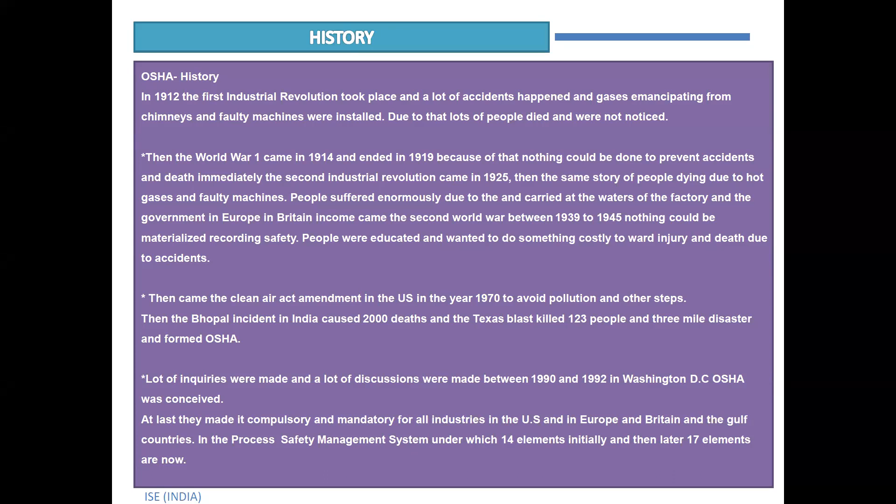So what is a catastrophic consequence? What happened in Bhopal? Most of the people may not be knowing what has happened. When I saw it in the paper in 1984 in the morning, I was in Mylapore where I was staying. When I read the paper, when I came over from the factory, I saw that 2,000 people had died - because I was working in the same chemical industry for about 15 years.

I have passed since I got my job there, so I was astonished to see how it had taken place. Most people may know what happened, but they do not know the history of things. I am telling you about 1967. I'll just give you 10 minutes, because people have to know what happened - people may not know the catastrophe, how it happened in Bhopal.

So people think 2,000 people died because gas leaked out - that is not the thing. It is purely a management misnomer. This is how it happened: in 1967, Bhopal - Union Carbide, the American MNC, had two plants installed, one at Jammu and another at Bhopal. They wanted to manufacture Sevin, the pesticide. They were using rail tankers to transfer the MIC liquid to the Bhopal plant, and then they were manufacturing the pesticide.

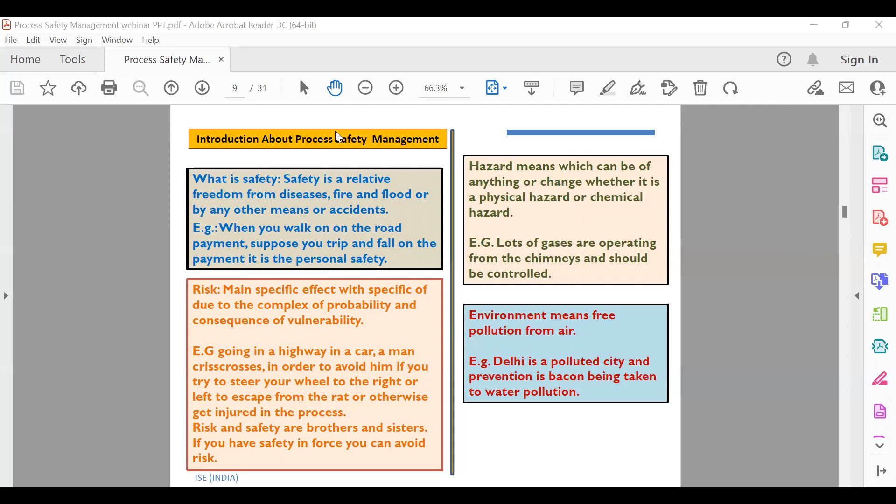How... Your voice is not audible, sir. Are you speaking? Arun? Sir, it's audible. Sir, it's okay now. Yeah, I'm able to hear you. Sir, safety is a relative freedom. Sharing ended, Arun. Please reshare. Just a moment, sir. Arun, are you able to share? Yes, sir. Do it fast, please. It's okay now, visible. Put it to full screen. Yes, perfect. Narasimhan sir, please continue. Thank you.

So I am talking about what is safety. Safety is a relative freedom from fire or disease or floods or any other means of accident. What is disease? Suppose you have floods, like what happened in 2015, when Madras was flooded. Lots of people were affected because of disease, endemic becoming pandemic, because of cholera and other diseases. So safety should be there. Stormwater drains should be perfect.

Fire. If there is any fire in the factory, you must have a fire hydrant pond to mitigate the fire. There should be a fire safety alarm. Then you have to take on-site emergency and off-site emergency planning. You have disaster management. These are the basic outline. Suppose fire happens in a gated community or in a factory, whether it's a process factory, a batch process factory or a mechanical factory, you must have a fire accident and disaster management team to mitigate the accidents or any floods.

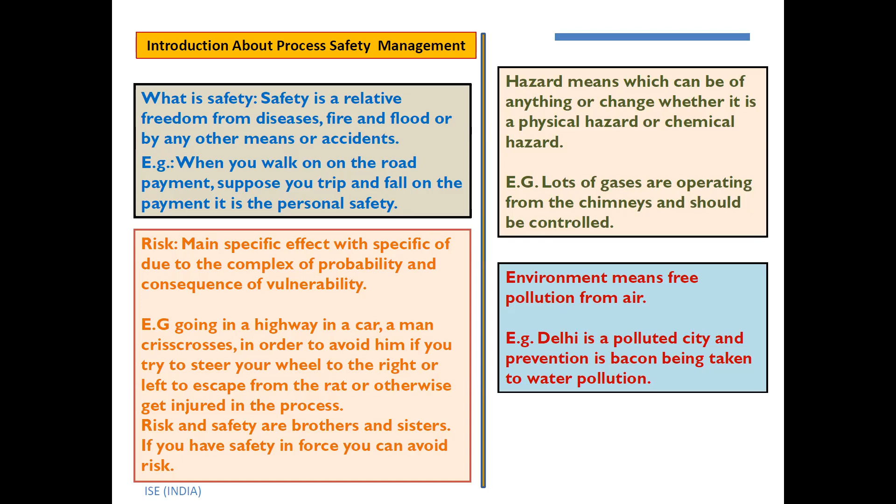So there I am giving a small introduction before going to the objective. If you have proactive management, you can plan the execution of things. You can do the safety work related to plant shutdown or anything accordingly. If it is reactive management, only when the accident happens will they analyze everything. That leads to a lot of consequences. So reactive management should be avoided.

Then preemptive management. In preemptive management, you must have things in force beforehand. You have to do a hazard study before commissioning and after commissioning. What are the consequences, existing and proposed? All such things should be there. So I am coming to organic safety. The organic safety of the management: conviction, compassion, communication, humility, and humanity.

What is conviction? The management should have conviction to start the plant when it is necessary. If they deviate from safety, then that will cost you millions of dollars. So safety, the conviction, they should have the conviction. Safety in force. At any cost, they must do the safety work. Even if gas is leaking through the pipeline, they have to shut down the plant, do the necessary work, then only start the plant.

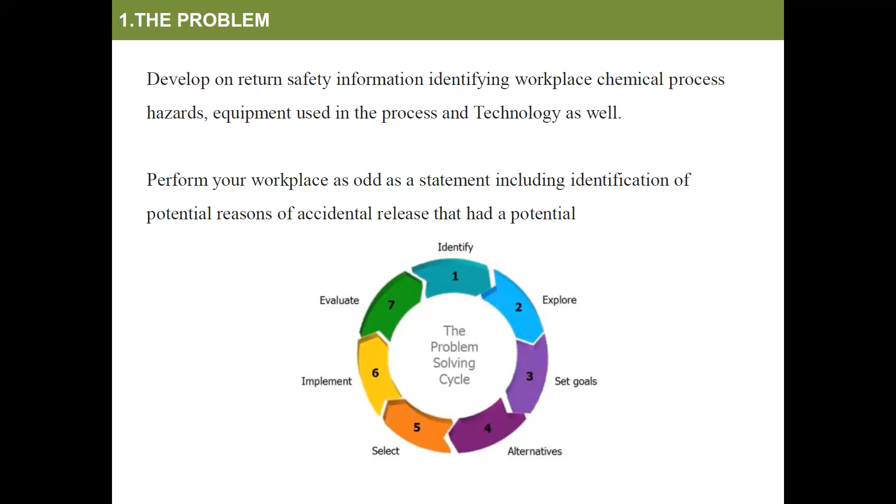How the standard works: establish a system for workplace hazard assessment, findings, prevention, mitigation, and emergency responses. Establish a system. You must have some system to establish the hazard assessment. Suppose it is ammonia, or hydrogen sulfide. Suppose you are starting the plant; you must have standard operating procedures for a long shutdown. What will happen if there is an emergency shutdown, what will be the consequences? If it is a power shutdown, what do we have to do? There are so many things.

They were not able to get gas for the last 4 years. They were applying hot water over the cylinder to get something, but they were spoiling the entire thing. They were not able to get the gas. I went there for such an audit last month. I gave a small suggestion.

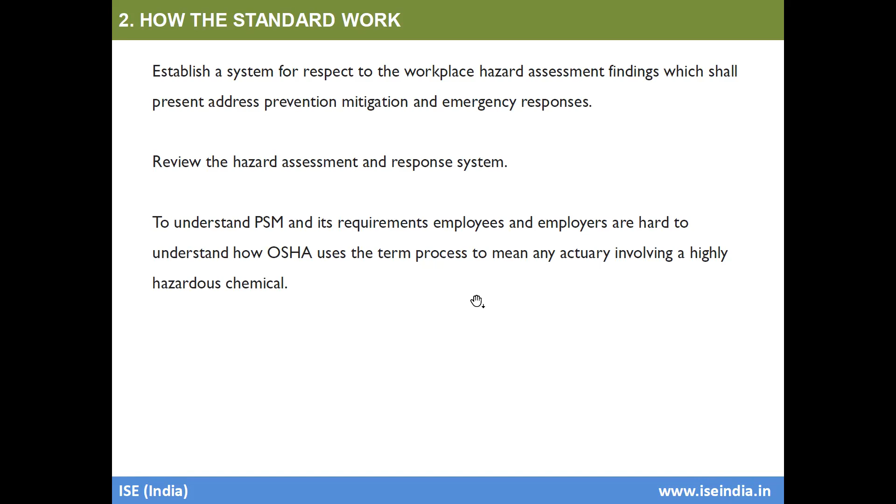So process safety information. Employers complete a compilation of written process safety information, whether it is an ammonia terminal or sulfuric acid plant or phosphoric acid plant. Everything should be a compilation of written process safety information. Whoever comes to the plant, if there is an operating personnel who has got some problem, to notify the problem, he has to refer to the compilation of written procedures. You should have process safety information on file.

Before conducting any process by the standard, if anything happens, any leaks or anything, he has to refer to how to do things. If there is a power shutdown, suppose it is a long shutdown, the process compilation will be there. How to do things when there is a long shutdown or emergency shutdown and power failure. They will also have information on the highly hazardous chemicals.

How to use them? Suppose you want to start a pump, carbonic acid pump, carbonate pump, or H2S pump, that is hydrogen sulfide pump, because both are hazardous chemicals. If you use them, you will have how to start the pump physically. A lot of information would have been given. So that is the process compilation.

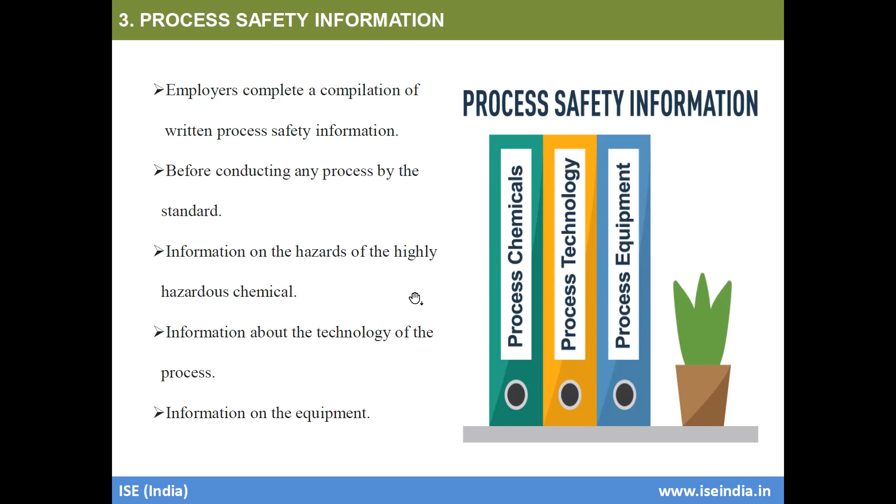What is process hazard analysis? Process hazard analysis means, suppose it's ammonia, what will be the thing? Then is it a hazard for highly hazardous chemicals? The employer must follow the methods. A process hazard analysis under hazard study they will do. Failure mode effect analysis, fault tree analysis. I am just coming to a small pep talk about these three things.

What is hazard? Suppose you want to commission an ammonia terminal. What they did in 1996, where I was the process in charge of the plant, was we took about 6 people, consisting of process engineer, supervisors, operating personnel, general manager, instrument engineer, and the people who are going to install the plant were also included. So we studied the hazard of any equipment. We do the analysis before commissioning and after commissioning.

It's a big plant, consisting of an atmospheric storage tank of 12,500 metric tons volume, because it is a double integrity tank, outside and inner side. The inner side is the inner cup. It stands on 279 pillars, where the storage tank stands 26.454 meters. Inside, the suspended deck is 4.54 meters. Between the outer tank and inside tank, 15 mm

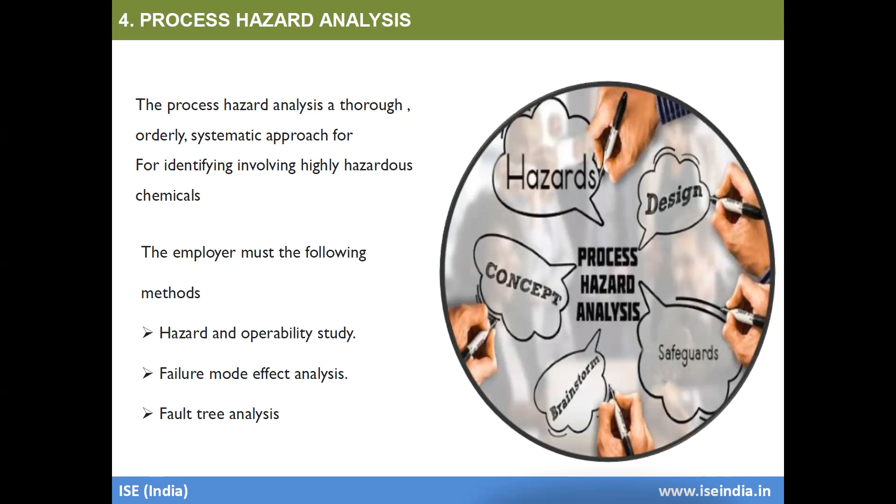Sir, we can take another 15 minutes. Yeah, I'll finish it. I gave a lot of examples, so you can brush up, sir.

Operating procedures: the employer must develop important written operating procedures for initial startup and operating operations, temporary operation, and emergency operation. This gives you standard operating procedures for what you have to do during initial startup, normal operation, long shutdown, temporary operation, and emergency operation. This operating procedure should be posted in the panel.

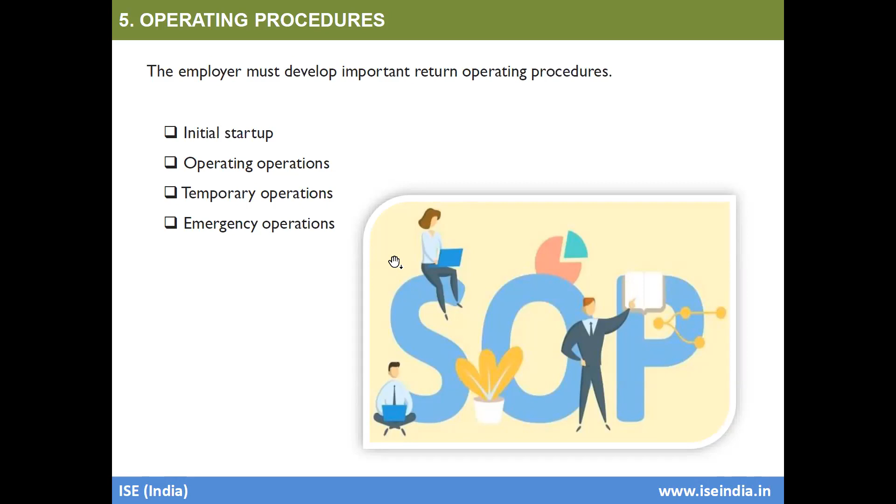Employee participation helps to control the cause of related risk. The employer must develop a written plan of action and implement employee participation as required by PSM. They should provide employees and their representatives access to process hazard analysis. Every employee should know the plan of action and participate in OSHA training required by PSM. Management has to involve employee representatives to inculcate the process safety management system, and representatives should analyze the process hazard analysis to gain knowledge using PSM.

Training: OSHA believes that implementation of an effective training program is one of the important steps to take. Hence, people presently involved in the operation should know about the process and its procedures. Employees are required to operate the plant according to its operating procedures. Process safety management training is a must for all employees and all categories, whether batch-wise, mechanical, chemical, electrical, or manufacturing. OSHA believes implementation of effective training under the 14 elements, and later the 17 elements, is a must.

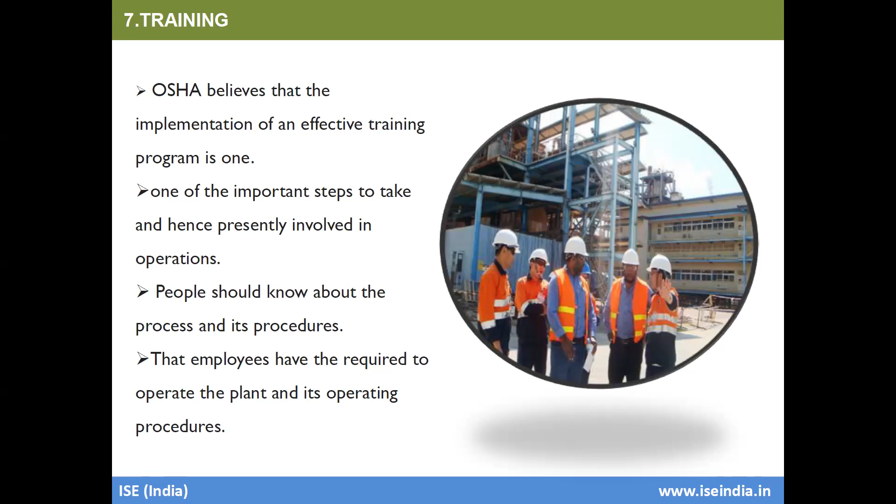What is refresher training? Refresher training of OSHA has to be given to every employee at least every 3 years. They have to undergo all of this because if a man doesn't know anything about PSM and comes for work, there is no need for him to come over - he can stay at home. So when management decides to impart the knowledge of PSM, every employee has to undergo training every 3 years.

There's also toolbox training every 15 days, and a quiz contest test every 3 months - they have to give so much training to the employees, managers, and supervisors. The general manager also has to know this; he should not just get feedback from lower rank people, he should teach the people. Only then can he be an effective general manager to the managers as well.

Training and documentation: the record of the employee must contain the identity of the employee, the date of training, and how it is verified that the employee understood the training. So if a man undergoes this process of gaining knowledge, he should attend the PSM training. Then his identity will be marked, the date of training recorded, and it will be verified by management whether the employee understood the training through a test. If he completes it, he will be eligible to operate the plant.

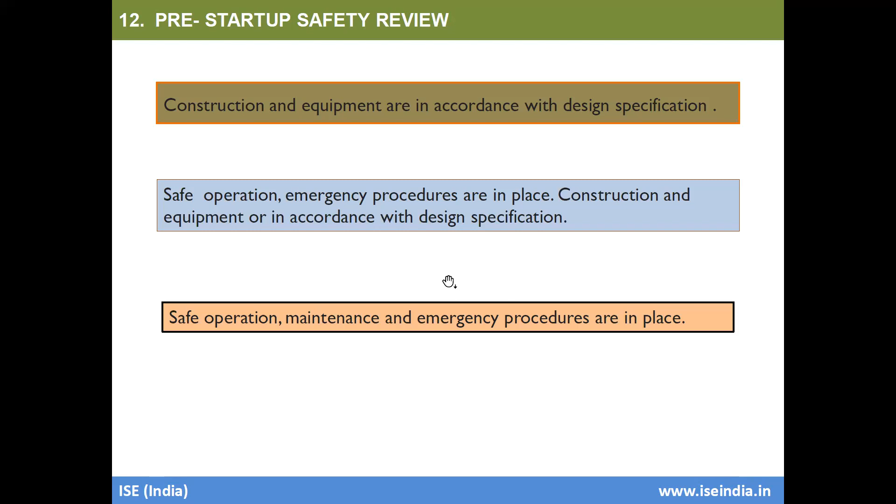What I told was what happened in 1983. There was nothing, because process safety management was not available at that time. Because of that, an incident happened in 1983, caused by the production manager, who didn't know anything about it. I have to say that because he didn't know anything. He became a top guy at RPG Coimbatore. He's a chemist, joined DCW, came as a process manager, and then went on to become the top guy, president of the company at RPG Coimbatore. He doesn't know anything because he is only a chemist.

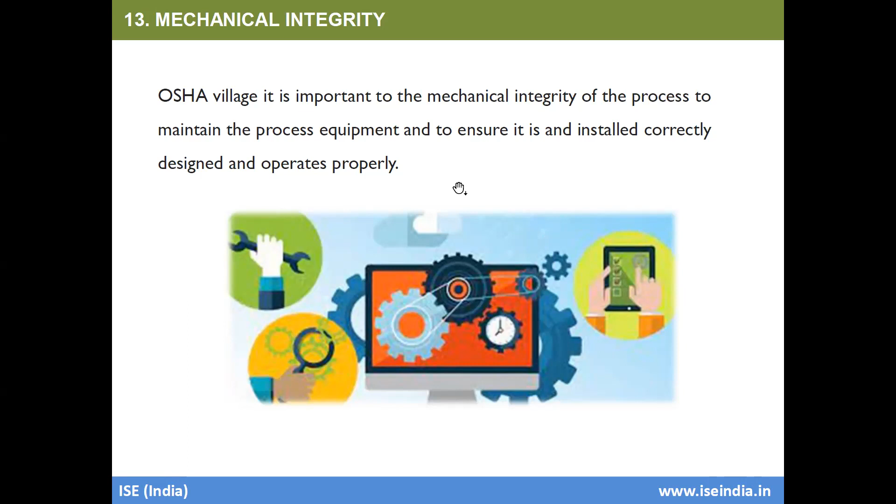Hot permit system: hot permit should be used for hot permit operation, conducted in an overhead process. The permit must dominate fire protection, etc. Regulations are being implemented. If there is a cold permit, anybody can give it to a worker or technician, and he can come and if there is a gland leak in the pump, they can do it. If there is a hot permit, suppose you want to take out a vessel or clean it, you have to keep a hot permit. If you have to check the thickness of the vessel, you have to do a hot permit, and you should be given welding.

For that, you have to do analysis of the oxygen, what will be the lower limit, what is the upper limit. Then you have to put an air hose in and do the welding. There is a lot involved - you have to purge with nitrogen, then put the hose.

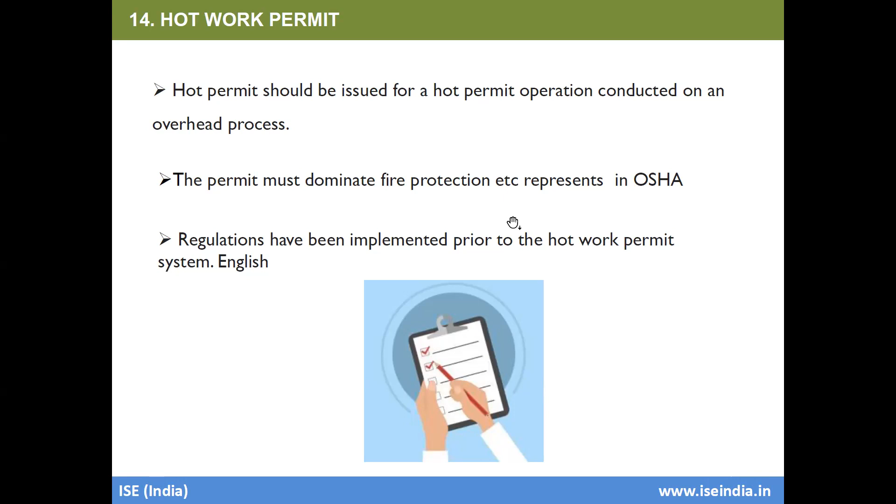So that accident relates to management of change. Because when there was an unloading problem, we pumped the liquid - management of change involves impact of the change on employee safety and health, modification of operating procedure, necessary time period of the change, authorization requirement for the proposed change.

We wanted to change because the liquid level was 22.95 meters, whereas it had come to 22.90 meters. We could not pump the liquid because the high level switch transducer became faulty. We immediately replaced it with another one, but still could not do it. Then we immediately called a meeting with the vendor, and analyzed everything. We could not do higher level pumping, so we got the original equipment from the vendor and replaced it, and pumped the liquid. Before buying that, we analyzed it with the process manager, operating personnel, supervisor, and general manager. So this is called management of change.

If you don't get the original equipment and want to change it, you have to do management of change. You have to review the meeting, the change requested, assess the risk of the change or high risk changes if any, conduct in-depth hazard analysis, identify hazards, modify design accordingly, implement the change, conduct safety review, and correct deficiencies. So these are the things you have to analyze before changing.